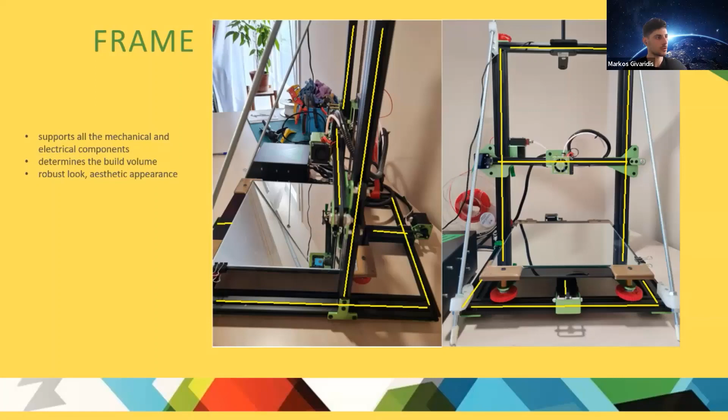So, when choosing a 3D printer frame, one has to consider the cost, the ease of assembly, the strength and the durability, as well as the application in terms of desired build volume. Now, aesthetics may be a great consideration to designers and businesses who may want their printer to look good and presentable to the public.

However, it may not be an issue to printers solely used for experimentation or basic prototyping. For example, me - I'm not a designer or a business, so I don't really care about the looks of the printer. So I can use something like this.

Now, if you search the internet for FDM 3D printers, you may notice that most of them have aluminum frames or steel frames, which look like the one in the picture on the left here. Those provide durability and vibration resistance. This is why most manufacturers decide to use this type of aluminum or steel profiles in order to create the frames of their 3D printers.

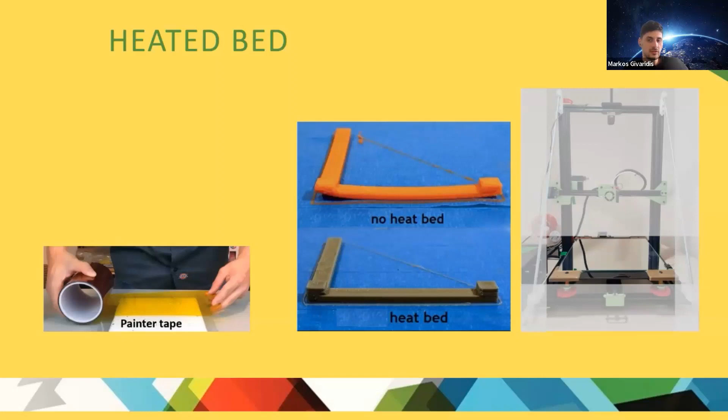FDM printers extrude molten plastic at a temperature high enough to allow it to flow, but low enough to cool and resolidify in a predictable way. However, if cooling happens too quickly, or the extruded filament reaches too low a temperature, it contracts too much, internal stresses build up, and adhesion and warping issues start to occur, especially at the interface with the printing surface. That's why the heated print bed should be at a high temperature while printing.

Moving on to the next slide, we can see some types of covers for our surface. The most common one is the glass cover, which is simply a glass surface added on top of the heated surface, so that we can extract it when we want to, take it out with the 3D printed part, cool the temperature, and this way it's much easier to take out the 3D printed part.

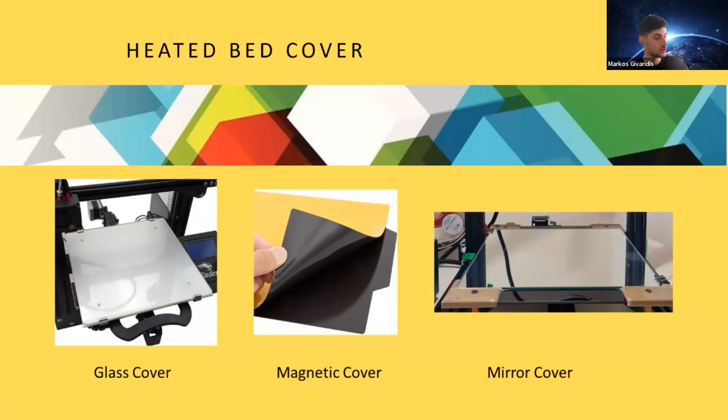Because you don't have to do the whole process of trying to create the perfect adhesion in the bed for the 3D printed model to stick onto. So choose the magnetic cover when you start 3D printing, then decide if you want to go to the glass cover or the mirror cover. Now, since I already talked a little bit about the adhesion stuff, let's see some adhesion solutions. So if you decide to go with the mirror instead of the magnetic bed cover, then you may also decide to use some of those techniques.

Some of the most standard products that people use in order for the model to stick on top of the bed is a classic glue. Here in Greece, we have the standard Uhu stick glue. I don't know if you also have it in your countries, but this is the most commonly known one. Another way to help your model stick on top of the bed is with the use of duct tape, as we saw on the previous slides. And my personal favorite is the hairspray.

It is the fastest one, and there are special sprays in the market, like the one shown in the picture, that are used just for this reason, which don't stick anywhere, but do a great job when it comes to the adhesion problem. So yeah, this is my personal favorite, and this is the one that I would suggest.

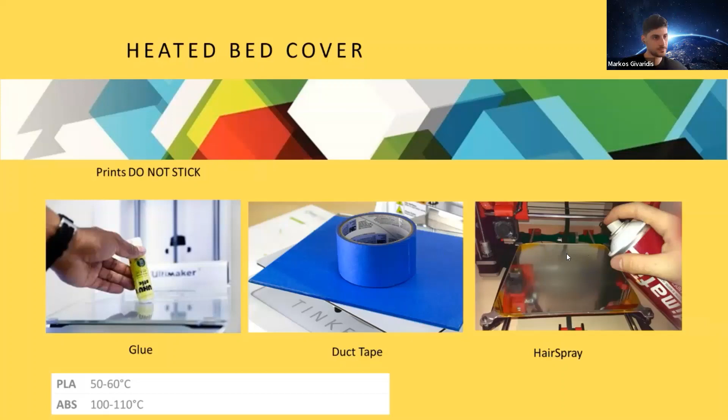Now, as we've already said, in order for the printer to print a 3D model, we need to actuate three axes, the X, Y, and Z axis. The X and Z axes are actuated on top of the bed, where the hotend is, but the third one, the Y axis, is actuated on the bottom, under the bed. Now let me show you the first video in order for you to understand, okay? This is the Y axis.

And this is the motor, which works when the printer is on in order to move the print bed to the front or to the back of the printer.

Now let's talk a little bit about the nozzle or the hotend. Sorry, the nozzle is this part, and the hotend is the whole component, which also includes the fan and the inside components.

Now, the hotend is one of the most important components of the 3D printer. As it heats the filament, it pushes it through the attached nozzle, extruding it in liquid form on the bottom and starting to print the model. Hotends are usually very durable and conductive, and they are constructed by metal, consisting of a few elements, which we will see on the next slide.

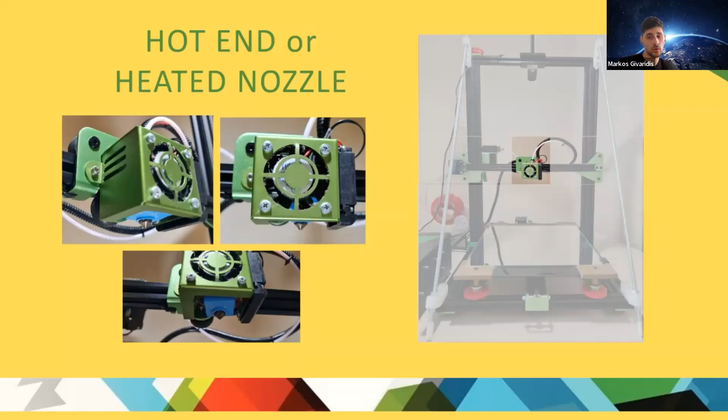In my opinion, the hotend is a very critical component of a 3D printer, and issues in this area can have very significant effects on the final print. The most common issue is the clog of the hotend, which can lead to incorrect extrusion or no extrusion at all. A common cause is heat creep, where heat climbs behind the melt zone, and material melts too early, blocking the filament path.

Now, this is a much easier, much better representation of the hotend, so I can show you more clearly what happens here. The heat creep is basically that the printed filament goes through, and since the temperature is very high here, it starts to liquify at this point, then it sticks on the nozzle. It doesn't go through. You still push it with the extruder, and the clog occurs. So your print basically fails.

Now let's see the standard procedure, the one that should happen.

Before deeply analyzing the main aspects of the hotend, some aspects of plastic filaments need to be taken into account. First of all, plastic is a combination of a polymer and additives. A polymer can be described as a material made of long and repeating chains of molecules. All these chains can modify their viscous behavior depending on the temperature.

At this point, in most polymers, there are two critical temperatures: glass transition temperature and melting temperature. Glass transition temperature, or TG, is when a polymer is in a semi-crystalline state and its chains have no mobility. Beyond the glass transition temperature, it turns to a rubbery state, expanding itself, and the chains gain some mobility.

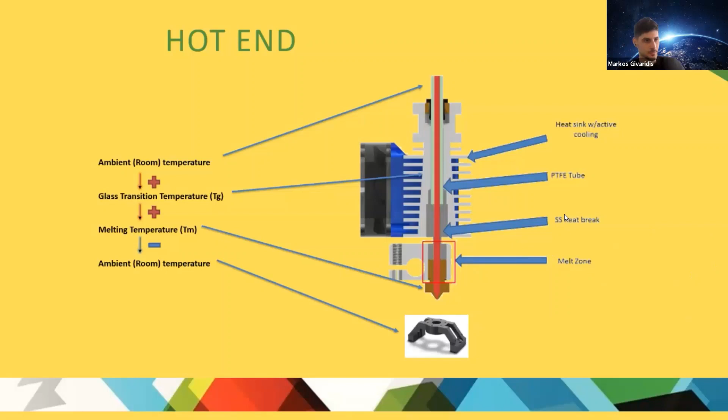All right, now let's see some components of the hotend. First of all, there's the nozzle, this one, which as you can see is pretty small, which is the part where melted filament comes out of the hotend. Of course, you have to know that the size of the nozzle defines the resolution in the XY plane, and therefore the print quality of the whole print.

Then there's a heater block, which joins the nozzle to the heat break and holds the heater cartridge and thermistor. Here are the inputs of the heater cartridge and thermistor. So I think this is a thermistor.

And then there's a heatsink which cools down the cold part of the hotend using a fan and lateral fins. It is made mostly of aluminum to easily dissipate the heat through the fins.

Poll time. So now let's stop a little bit so we can all decide what's the right answer.

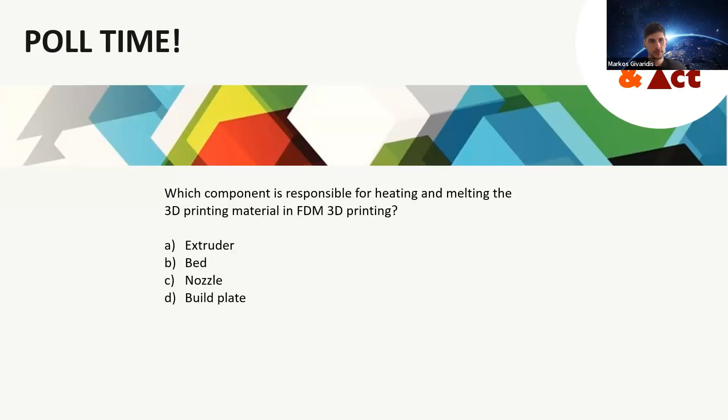All right, let's close the poll and go on. So this is a hotend. This is a small video where you can see how the hotend works.

Let's see how it moves on the X and Z axis. Here you see it manually moving. I think this is Julie moving the hotend right and left, this is the X-axis. Also, this is the Z-axis, moving up and down.

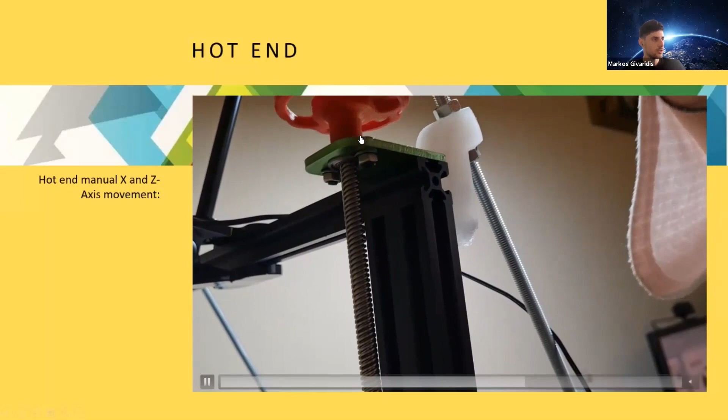So this is a manual way to move your printer on the Z-axis. And we also printed this part in order to make it easier to use the manual movement. You can also do it.

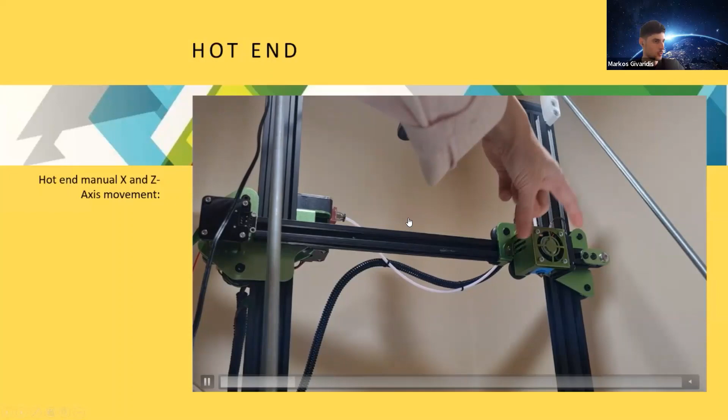There are many 3D printed files that you can find on the web that you can print to assist your printer and make it even better, let's say, maybe even more robust, or sometimes even make the printer more accurate.

All right, now how are things moving? This is a small summary of what we said. There are at least 4 motors on a standard FDM 3D printer.

There are 3 motors, one for each axis, and then there is an extra motor for extrusion. So basically what the 4th motor does is push the filament inside the hotend.

How do they stop? Every motor has a stop switch at the end of its movement, and when it touches the switch, it stops moving. This way, even if we don't program the 3D printer correctly, the motors won't be damaged because they will always stop when they meet the switches.

Now, apart from motors, in order for the components to move, we need belts, which connect the motors with the hotend, and guides on which the hotend and the whole structure can move.

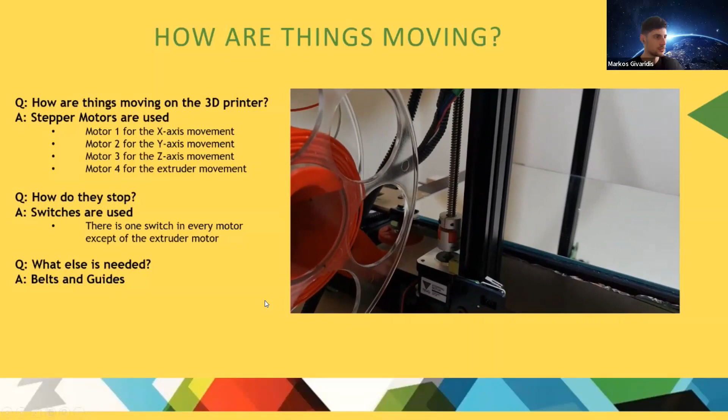Let me show you a small video. So here you can see it moving on the Z-axis. So this is the motor.

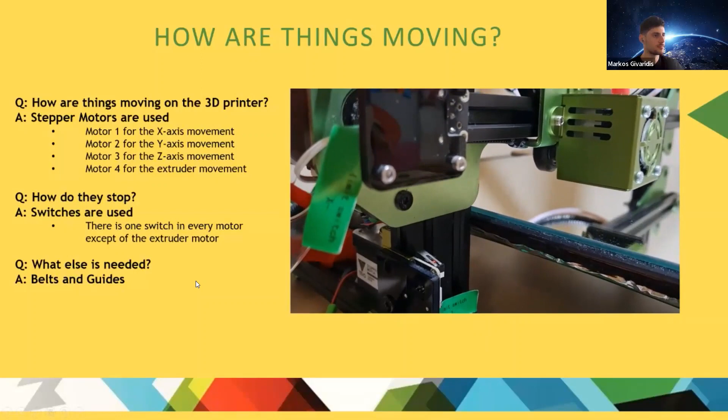Is that it? Maybe. Okay, I think in the next slide we will see those components. Yes.

So here you can see the stepper motors, the belts. This is one belt, another belt you can see here, so this is the Y-axis belt, the X-axis belt, and the Z-axis is moved through this linear actuator here.

And not a belt. I think we can see some switches maybe here, I'm not sure. Maybe I think this one is a switch, but also this one is a switch.

So imagine this component going through the whole X-axis until it reaches this point. And when it touches the switch, of course, it stops so you don't break the 3D printer.

Okay, now probably the most important part of the 3D printer is the extruder.

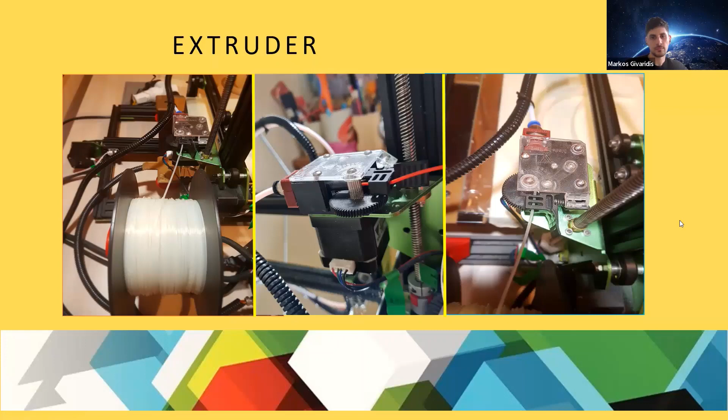Most people, when they refer to the extruder, they are talking about the cold end, this part that you can see here. The cold end utilizes the rotation of a gear, with the use of a motor, in order to push a filament inside the hotend. But the truth is that the extruder module includes both the cold end and hot end.

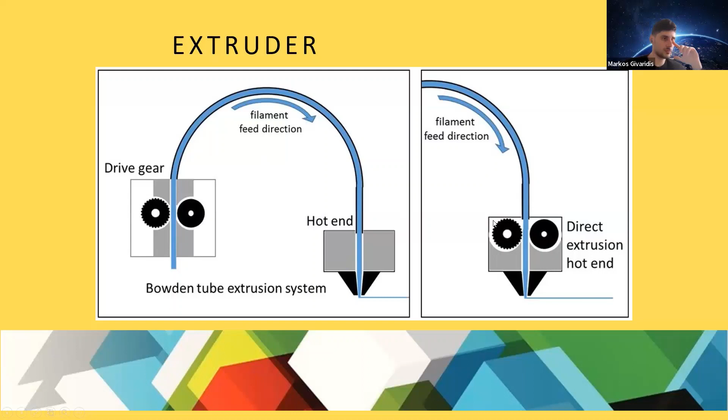On the other side, you can see a direct extrusion system. The only difference here is that the hot end and the cold end are positioned together. In this case, there is no tube. You push the filament right inside the 3D printer, the extruder, and start printing directly from here, so no Bowden tube here. These are the two standard ways, and I think there is no other way right now that you can do it.

Let's do a small comparison between those two. The Bowden extrusion system has cleaner movements, meaning that since the cold end is not attached to the hot end, there are no vibrations from the motor or the cold end, which could end up to a bad print. Also, since you can place the cold end anywhere on the printer, we have the ability to create printers with larger build volume. On the disadvantages, we need a more powerful motor in order to overpass the friction inside the tube, but let's say this is not a much more powerful motor, it's just to bypass the tube. But most important is that we have slower response times between the cold end and the hot end, and sometimes this leads to material complications and print failures.

That's why most of the new printers use the direct extruder, so they have less printing failures. On the direct extrusion system, it is more reliable in terms of extrusion, and therefore in terms of retraction also. We need a less powerful motor since the systems connect together, and it works with a wider range of filaments with ease. On the cons, since the system connects, we have vibrations from the motor, and also it's harder to do maintenance since everything is together, and it's hard to understand where the problem is sometimes.

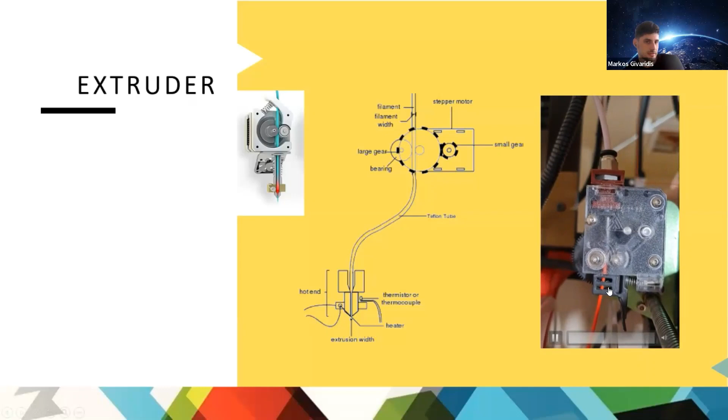Now you can see how the extruder works here. It pushes the filament inside the Teflon tube, this is the Teflon or Bowden tube, and from here it goes to the Hotend and starts melting at this point. So don't make this mistake, guys. This is not this, okay? This is different than this.

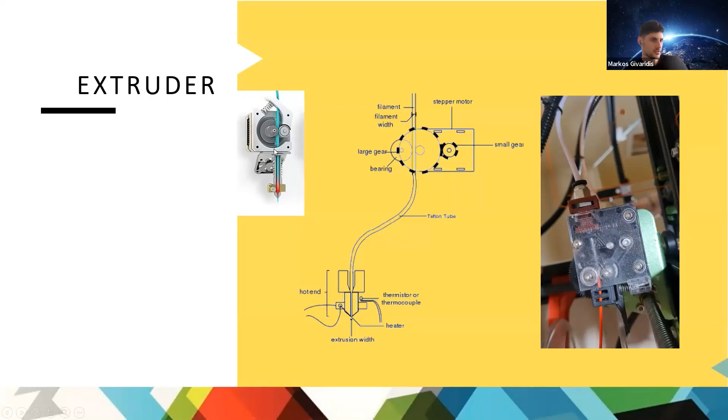All right, one more question, real fast. What is the purpose of a build plate in FDM 3D printing? A, to hold the 3D printed object in place. B, to provide a smooth surface finish. C, to prevent warping of the print. D, to apply a protective coating.

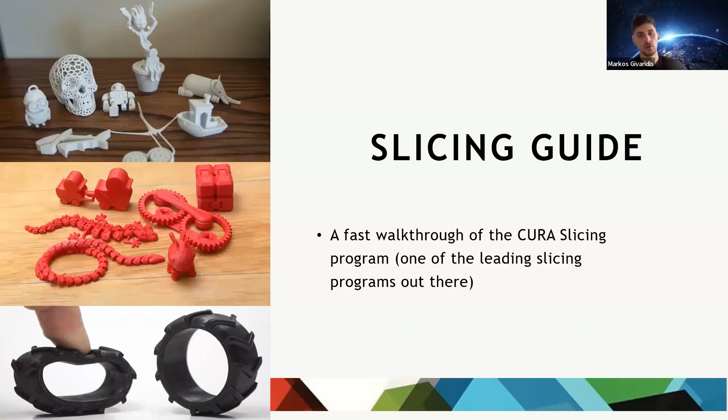Slicing guide. So here I'm going to show you real fast some slides regarding the slicing of a model. As you may know, before printing a model, we have to use a slicer program in order to basically find the right way to provide the G-code to the 3D printer so that we have a perfect print.

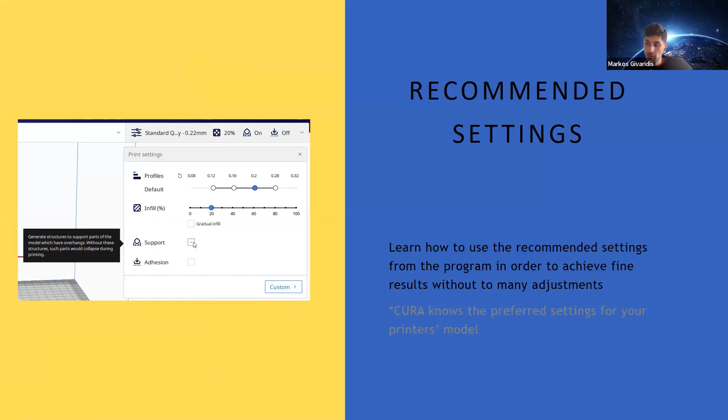Okay, we're here. The adhesion is a special way to adhere the model. So instead of using hairsprays or glues that we discussed before, you can use this type of adhesion, which is much easier because you don't have to do anything else - you just click this button. But you use much more material when you print, because basically you create a raft on the bottom of the model, a plastic raft, for it to stick.

Then we can change the walls, the wall line count. These are the walls of your prints, so as you may understand, the more walls, the more strength in the print. If you want your print to be strong, for example to give to kids to play with so they don't break it, add a lot of walls. But of course the printer will require more time and material to print it.

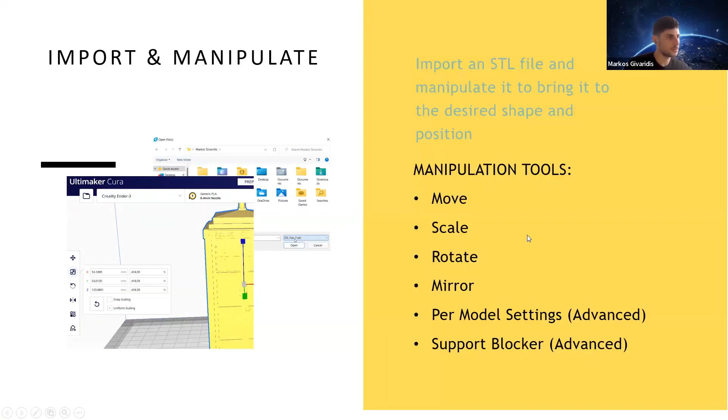Oh, oh, it's the mouse. Okay, now I understand. That's my mistake.

And the last one is the speed. Now, I put the speed here in the options for you not to touch it. If you don't know exactly what you're doing, don't mess with your printer speeds - your printer knows how fast it can print. There's no need to do more or less than what it does right now. In my opinion, you need almost a year of 3D printing experience before you start messing with printer speeds, because you may destroy it, and we don't want that.

Some other custom settings you may find yourself experimenting with are the retraction.

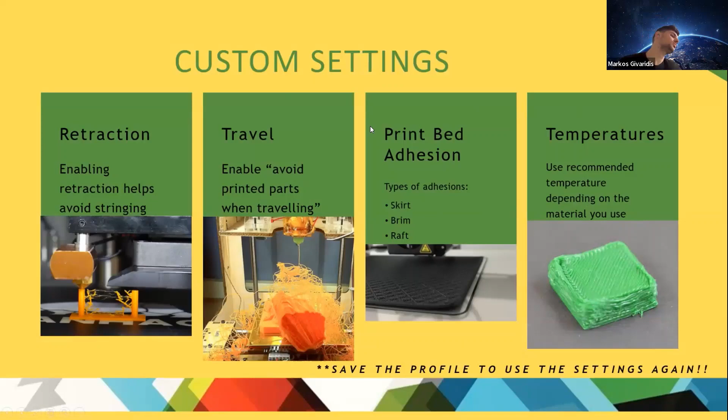And the last thing I'm writing here is that when you change all the custom settings, please save the profile so that you can use the settings again next time, so you won't have to do the whole thing all over again.

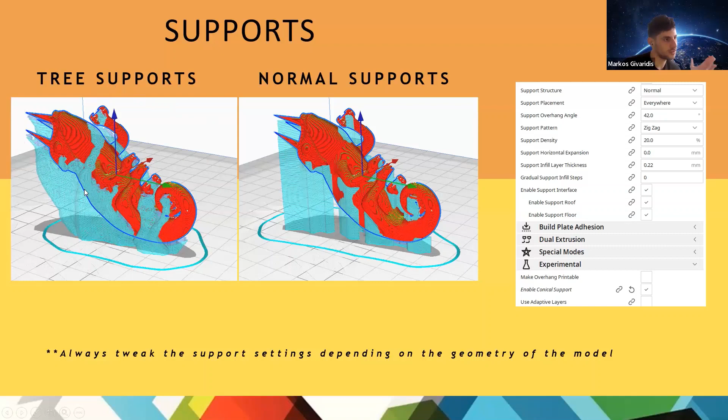I suggest that the first time you print, you go with normal supports to understand how supports work. But when you are familiar with supports, the tree supports are the perfect way, because what the tree supports do is go and touch your model exactly where it should be supported and start printing. Here, as you can see, it's supported everywhere, but with tree supports, you can find exactly where your print needs supports without touching the whole model.

Because, as you may understand, this is plastic and this is also plastic, so when you take it out of the bed, it's much harder to detach them from each other.

And you can see exactly how your print is going to go, so you can inspect your model, as I write here, and then you export it to a USB and print it.

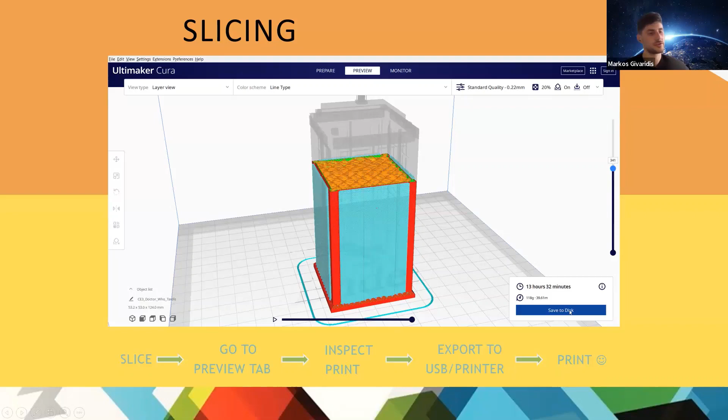The reason I'm mentioning this slicer is because it has some advantages. It has more tools like cut, arrange, etc. It has paint on supports, so you can add and delete supports manually and very easily. But this right now is not actually a pro for Prusa Slicer, because now you can also do it with Cura if you find the right add-on and experiment with it.

But the most important one is the configuration wizard, because based on the combination of your printer, the filament and material that you use, and your print, the configuration wizard designs all the parameters for you, so you don't have to manually create a custom profile, for example. I would suggest using the Prusa Slicer if you have a Prusa product, just in case.

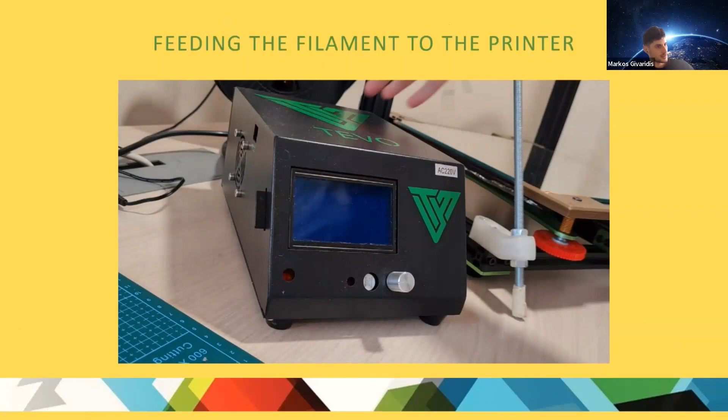We should first feed the filament, of course. We need a robust stand. We open the printer. Let me close the sound. We go to prepare.

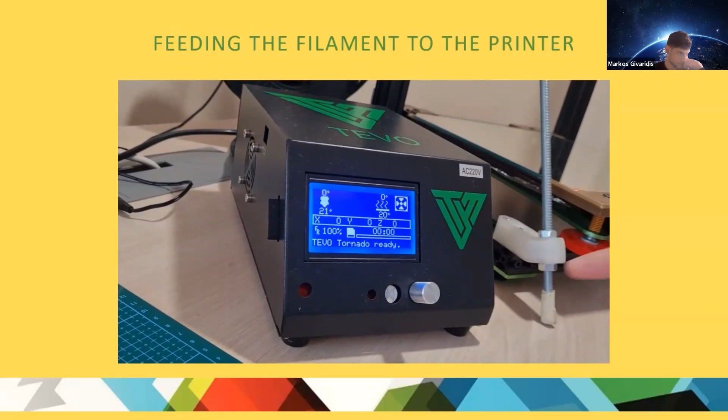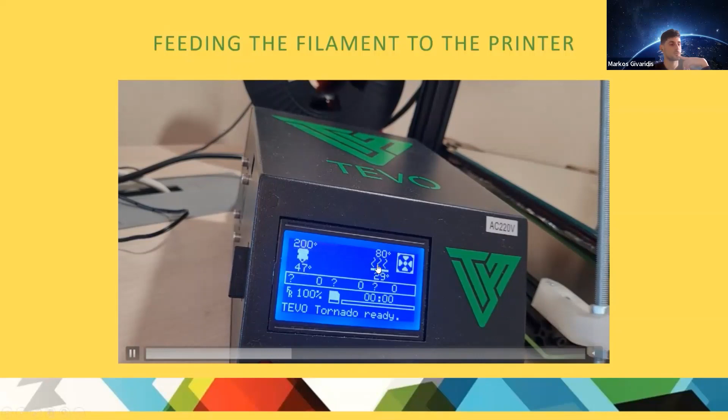Preheat. So right now, we actually preheat the bed to the right temperature. In this case, it's 50 to 60 degrees. And we also preheat the nozzle, the hotend. So when we have both of them preheated, we can feed the filament to the printer. Of course, you can also feed the filament just by preheating the nozzle. You don't need to preheat the bed, but it's good to preheat the bed if you want to start the printing process right after you import the filament.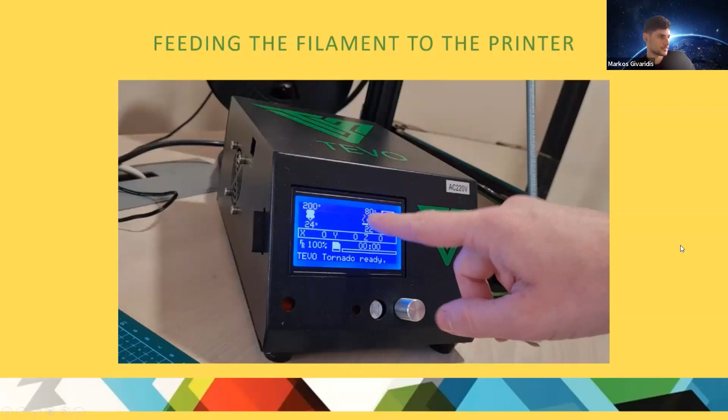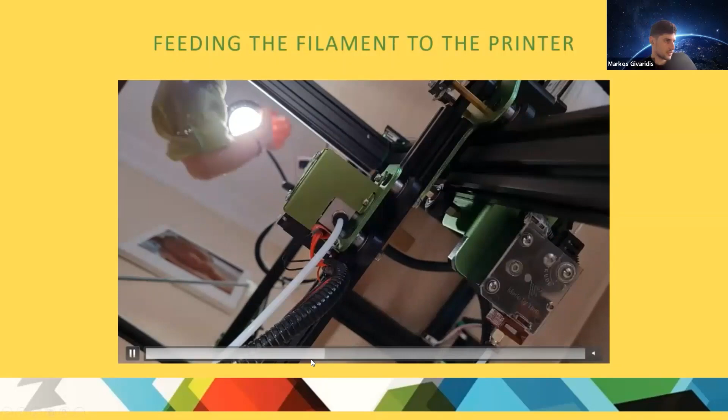Oh, sorry. All right, let's... come on. Why? Okay. Oh, wait a minute. Okay, here we are. I'm just going to... let me leave it here. So as you can see, this is the previous filament, I think. Let me see. Okay, here we are.

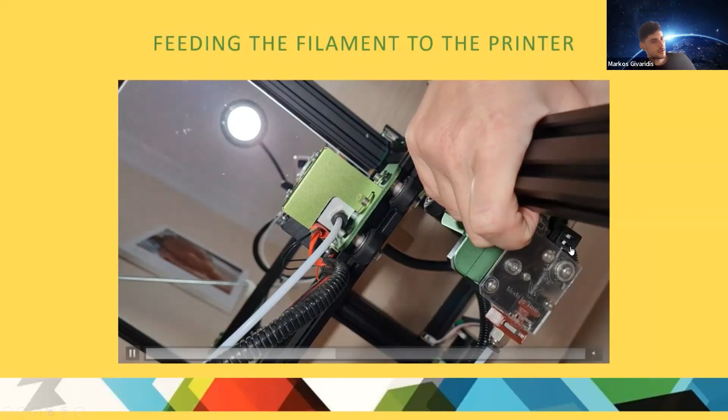As you can see here, we export the previous filament, because now the nozzle is heated, so it's liquid on this part, making it very easy to export. There is a button here that you push in order to export the filament more easily, because it locks - these are the sprockets that we talked about before. And you just take it out. That's how it looks when you take it out.

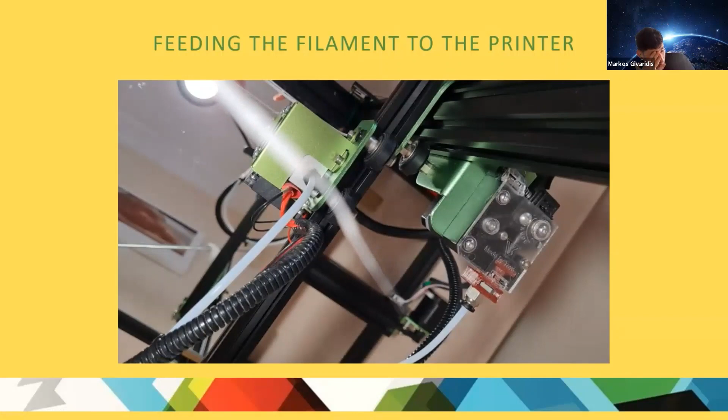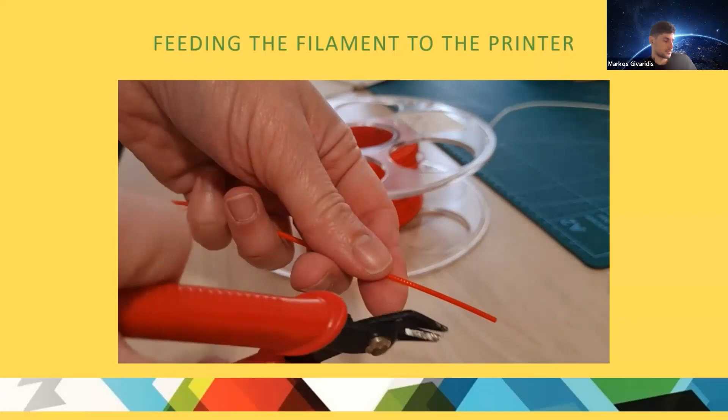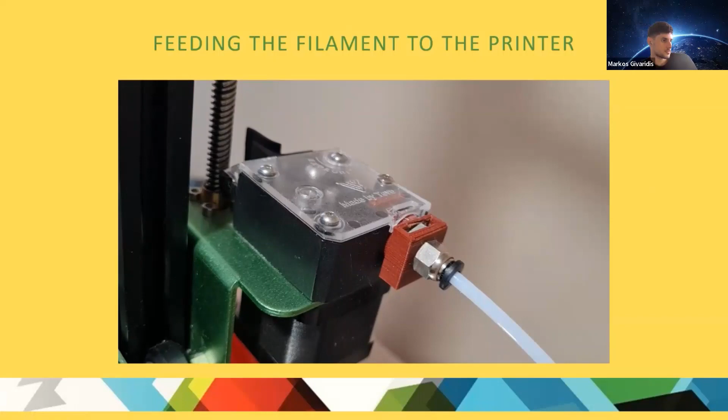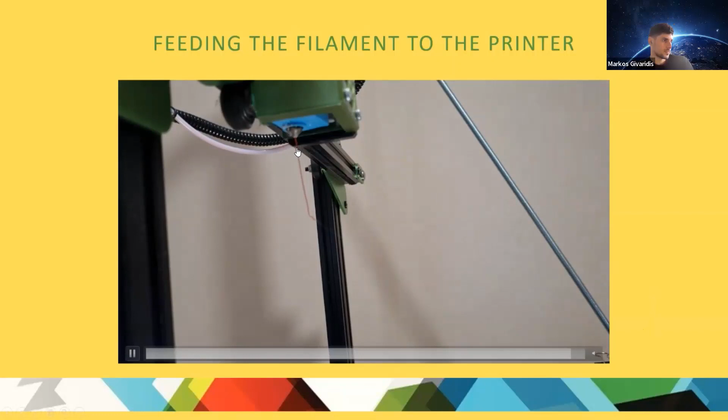And on this video, we put on the red filament now. Keeping the temperature as is, our hotend is 200 plus degrees right now. So the same way that we exported the previous filament, we import the new red filament inside the extruder. Push it through. While you push it, you may see that from white it becomes red on the nozzle. And when it's fully red, the material that you export from the nozzle is fully red, then you are ready to start printing something new. You see here, it's fully red. So we are ready to print.

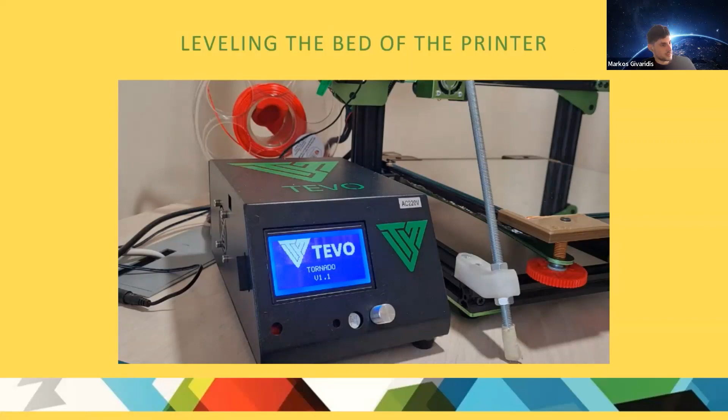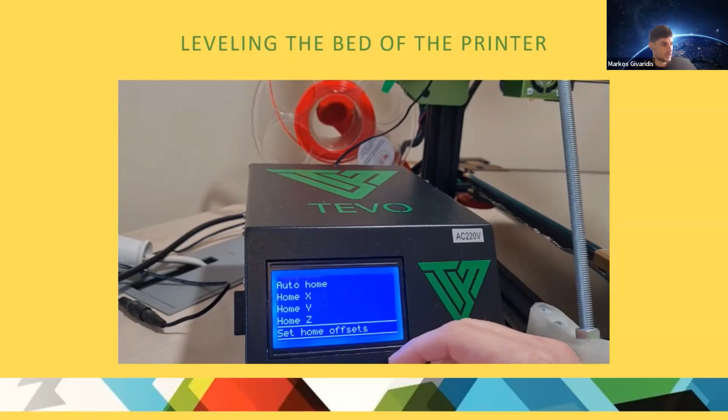Okay, another video is leveling the bed. For most of you, when you buy the printer, you will need to level your bed. Leveling your bed is not an easy process, at least for the first time. Now, what we have to do is again preheat, because we have to have everything on the printing temperature - the temperature that you actually use while printing.

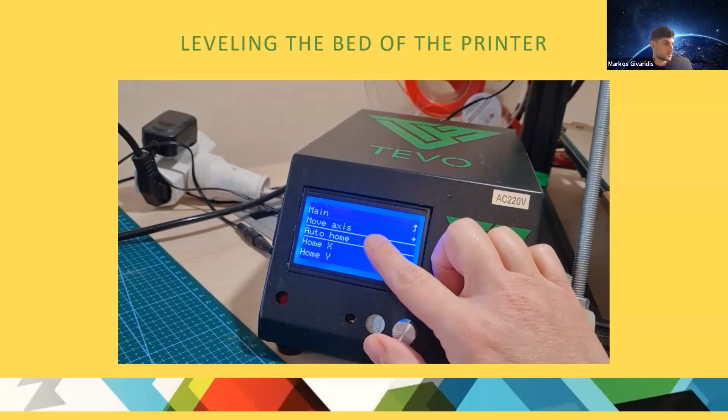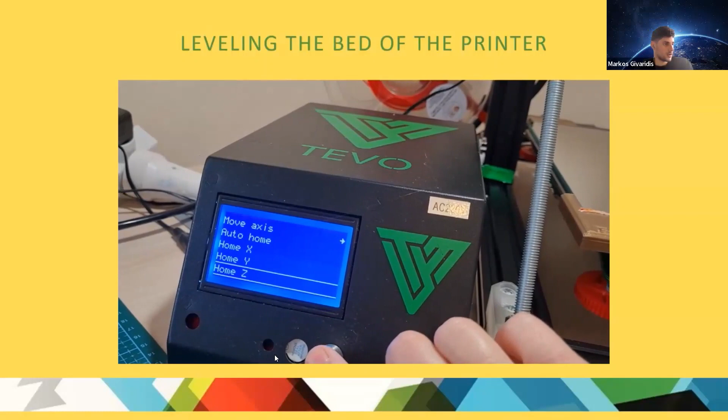The process starts with you moving the nozzle to the bottom, so you home the z-axis. Like that. And you take a piece of paper, a standard piece of paper, put it between the nozzle and the bed, like this, and try to find the sweet spot between the nozzle and the bed. The sweet spot is where the paper can go through, not stuck like you saw before - this is a much better way to show it. It has to go, as you can see, it doesn't go through. So we have to recalibrate.

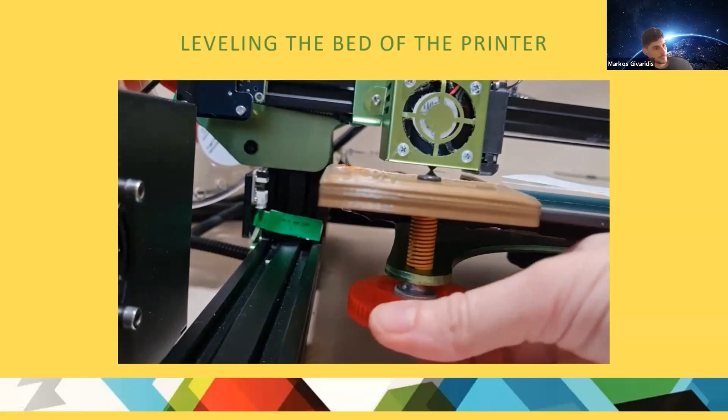On this printer and most printers, on the bottom of the bed is the calibration sprocket. As you can see now, the paper can move up and down, right and left. But you have to find some resistance when moving the paper, and this is the perfect spot. It won't be perfect if the paper doesn't find any resistance when you move it, because this means that it's over-calibrated, let's say. So again, here we try to calibrate the other corner of the print bed.

And this way we calibrate all four corners. And when we calibrate all four corners, then we can also calibrate the middle of the printer. We actually restart the whole process again and again.

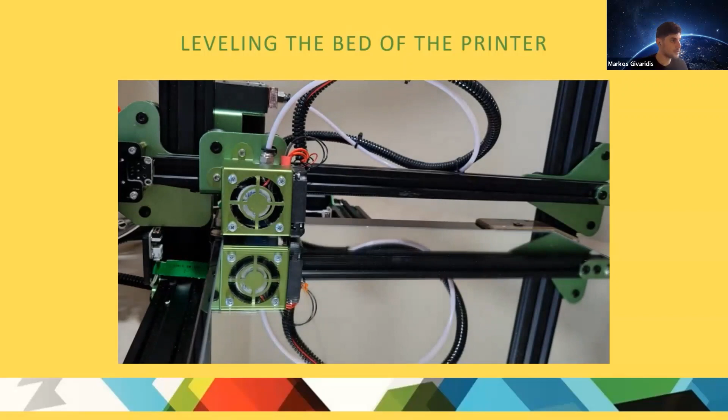Just so you know, there are many STL files that you can find on the internet that you can use and put them on your USB stick, and feed it to your printer so you can see if your printer is actually calibrated, if you did actually a good job leveling the bed.

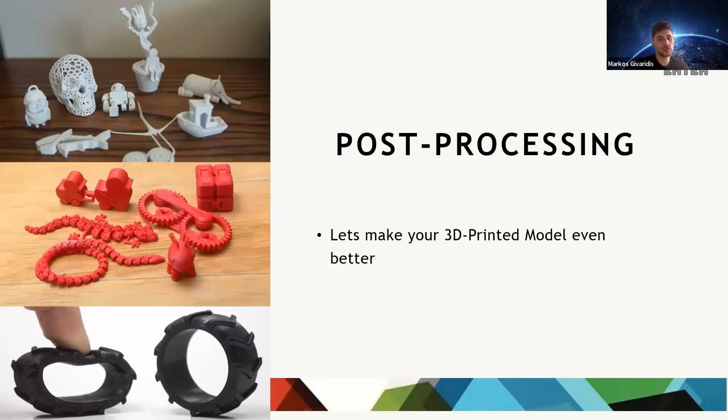The first thing we always do after print is removing the supports. This is what I was trying to tell you before regarding the standard supports and the tree supports. This is how we see the model the first time we take it out from the printer.

And those plastic parts have to be extracted from the model. So we can use many tools to extract them, and we can also use our hands to extract them. As you can see, the next step is something like this when you extract them, or something like this.

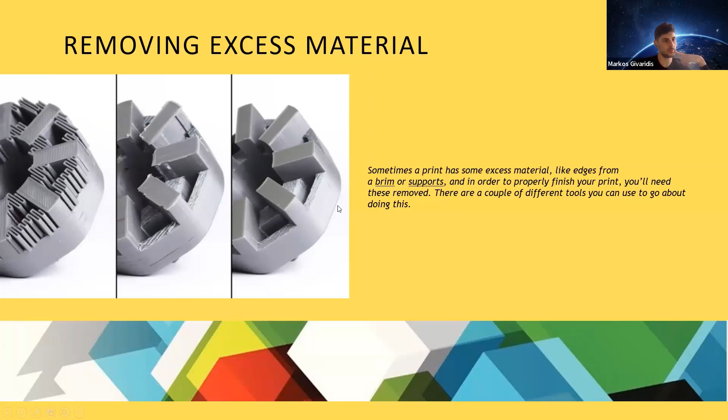Now, there's many tools, as I said, to achieve that, and you can also smoothen your prints with these tools. My personal favorite is the rotary multi-tool, which is very simple to use and also very fun to use.

Let me play the video while I'm talking. As you can see, the tool uses a motor to rotate, and the only thing you need to do is attach the appropriate sanding attachment, then start the cleaning process, which may take from 1 minute to however many minutes you want. This is not a standard procedure, so you can do it as much as you want to achieve the best results, depending on the design of the model, etc.

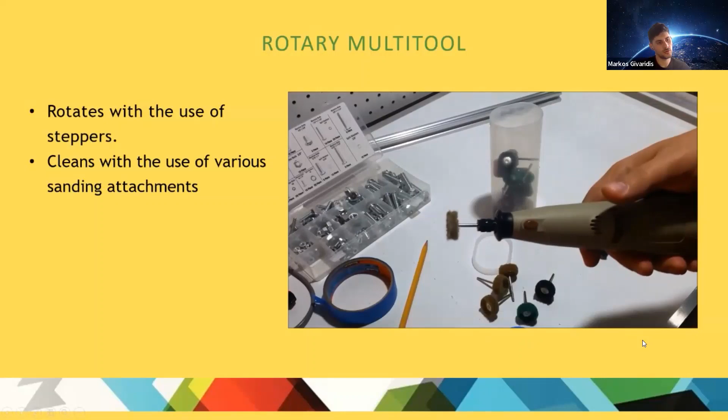And you can see what else I don't remember. Yeah, he just uses this finishing sanding tool to make the print smoother.

Okay, of course, sanding - you can always use the traditional sanding methods. For beginners out there, this is a great choice since the materials are very cheap and easy to find, and it is also very easy to do.

In any case, I would recommend watching a video on YouTube before starting the process, for those who are total beginners. This way you will know what type of sandpaper to buy and how to do it without ruining your model. Also, doing the sanding process manually, you can be more precise sometimes, because if you have a multi-tool, you may choose the manual method instead, since a multi-tool is very fast and may ruin your model.

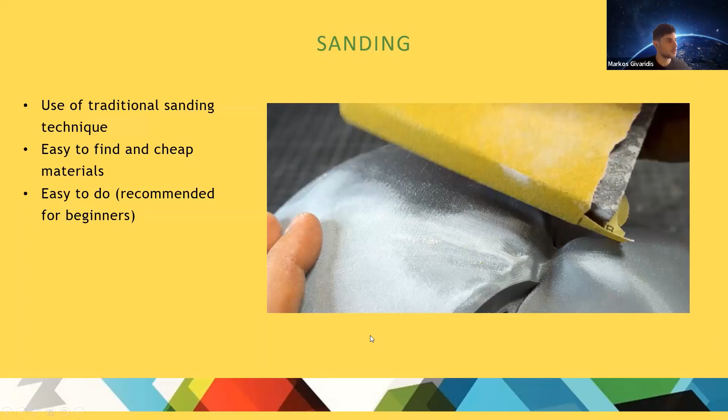So here I have a sanding video. We will see a 3D printing model being sanded.

Okay, first things first, do not forget to put your mask on, and then we are going to start sanding with a 120 grit sandpaper. Again, the coarser grit to really help knock those lines down. Now I've wrapped the sandpaper around a sponge. It helps me have a better hold of it because you're going to be doing a lot of sanding.

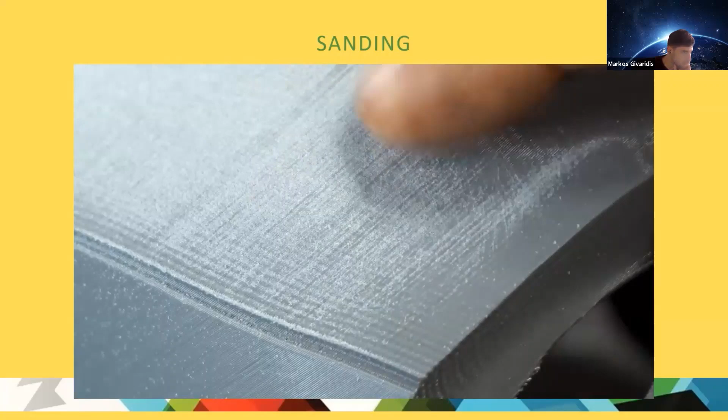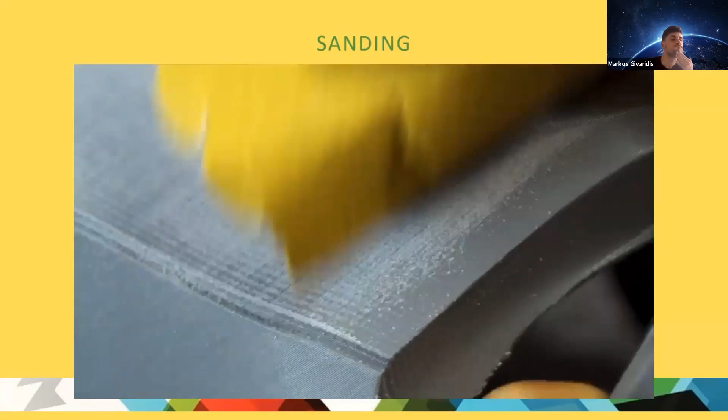So if we take a look here, we can see that the layer lines are still there. Not a lot in these helmets, really cool, but we still need to knock some more down. I'm still using the 120, and you can see the more you work that, the more you'll get rid of these layer lines, so you're not going to have to do a lot more of the finer sanding later on. You can see here the layer lines are almost gone, and you're going to want to do that across the whole helmet with that 120. Don't forget to get into the cracks and crevices - this is why I like wrapping the sandpaper around a sponge. The sponge is soft, and it really lets you get into all those little spaces to smooth that stuff out.

Now we've done the entire helmet, and it's hard to really see much of a difference, but if you look, you can see most of those layer lines are really knocked down.

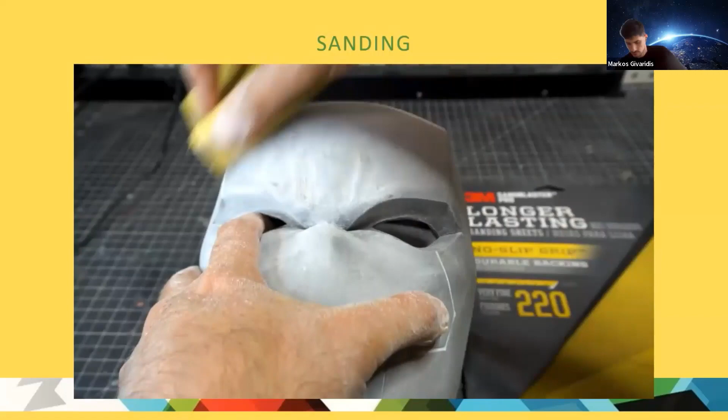Now we're going to go with the 220. Again, as we move up, the sandpaper gets finer, and it's still doing its job, making a smoother and smoother helmet. Don't forget, as you're sanding, to do all the little bits of cracks and crevices, because you don't want those to stand out.

Now we jump up to a 320. Again, a finer sandpaper, a finer finish on the helmet, and again, you're going to do the entire thing. Of course, you're still wearing your mask.

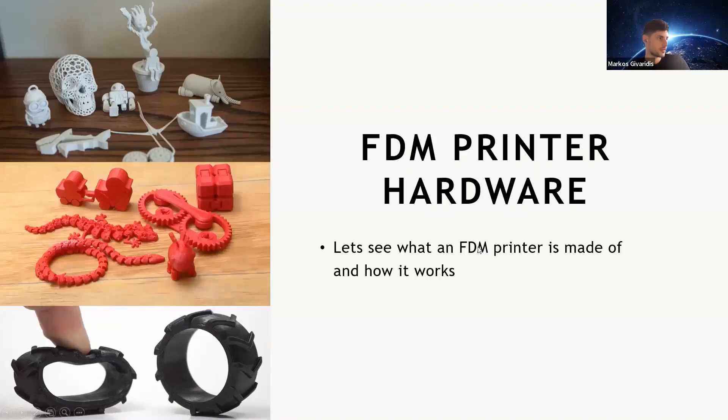All right. Oh, sorry. Okay, let's go through everything really fast. Go back where we were. Okay. Okay.

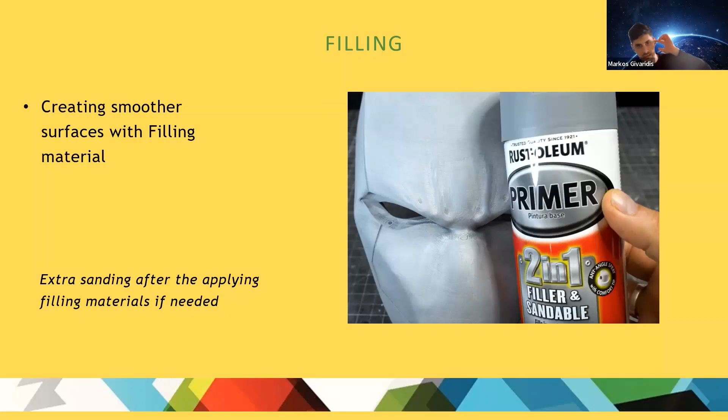Of course, after applying the filler, you can use some sandpaper and do some extra sanding if it feels like it. So basically, repeating the process.

So even after all that sanding, there are still some layer lines. You can barely feel them with your nail, but they're there. So we're going to use some fillable, sandable primer for that.

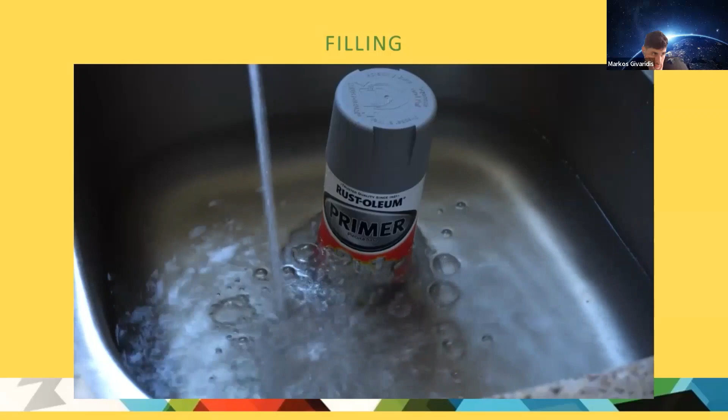Key thing is warm the can before you use this primer. Now, I like to put it in a bath of hot water for a little while. This stuff is thick, that's why it's sandable and fillable, and this way it breaks it up and makes for a great mix, and it'll coat it really well.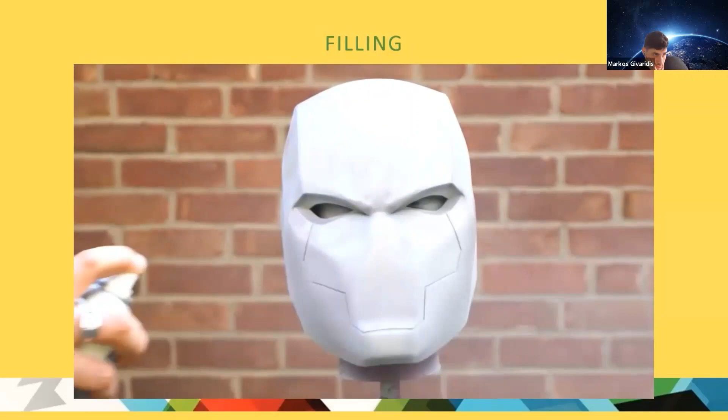Now again, make sure you're not getting too close. Stand off, as the directions say, 8 to 10 inches so you're not getting any runs, and just give this a really generous couple coats. Let it dry, maybe even get it another coat to fill in all those layer lines.

Sandable fillable primer is magic. If you look at this thing, you can see almost no lines now in this helmet. It's going to have a little bit of grit to it. You're going to have to do some sanding after this, but those major lines are gone.

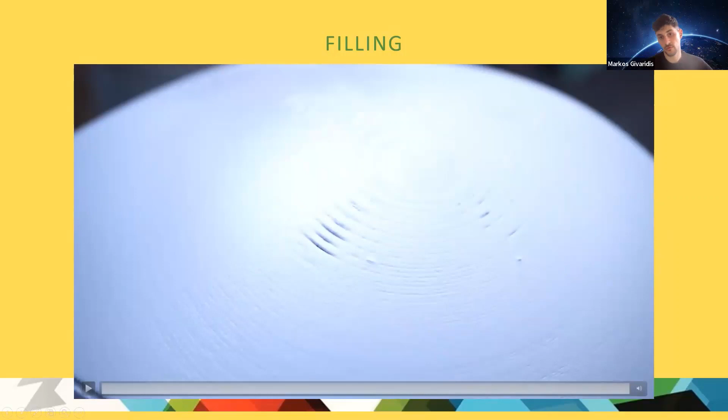So as you can see, some major lines are gone, but some are also there. But we've already done a great job, right? Sweet. So of course you can repeat this process until you feel that your model is smooth enough.

Just be careful because this process, since you sand, then fill, then sand again, you may sometimes hide some of the detail of your model, like those lines on the mask, for example. So yeah, be cautious.

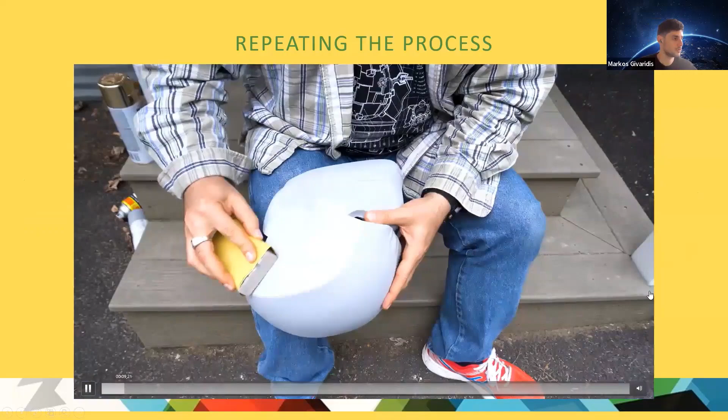Now, if you remember, we did have some thicker lines. To take care of those, we need to sand this sandable fillable primer so it is smooth before we go ahead and put on our glazing compound. And again, while you're doing it, don't forget, work in these cracks. We don't want them to fill up with the primer and the things we're using.

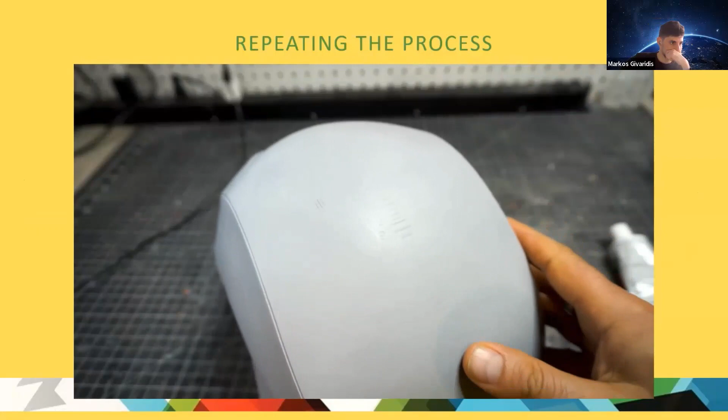Now we're going to go ahead and give this thing a wash. I wash the print multiple times during the process to get a lot of that grit off. So here we go. Here's some of those thicker layer lines.

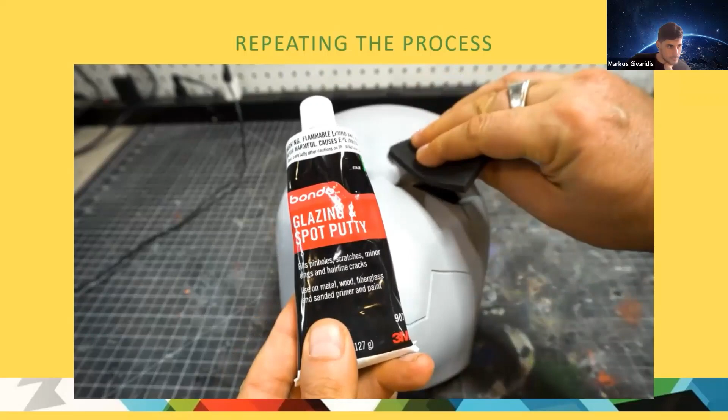And this is when we're going to use our glazing spot putty. I like to use a piece of foam because it really helps me get into the cracks and crevices when I'm working. You don't want to sort of cake this stuff on, but you want to put enough in there to fill those lines to make sure that when you sand this, you don't see them.

And some people go overboard sometimes with this glazing compound. I am guilty of it myself. You really only want to use it when you're taking care of these really thick lines and some of the minor lines throughout the helmet.

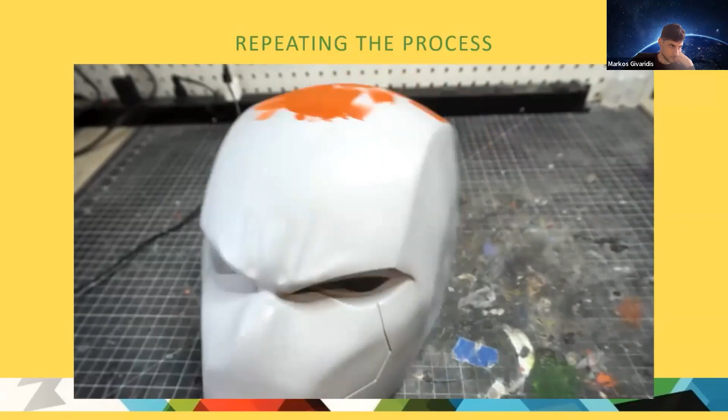At the same time, if you really want to get that smooth surface, you might go through the whole helmet like I'm going to do and find areas where you can still see some lines and take care of those. Because the last thing you want to do is get to the end and get ready to start putting paint on, or put the paint on and you start seeing some layer lines.

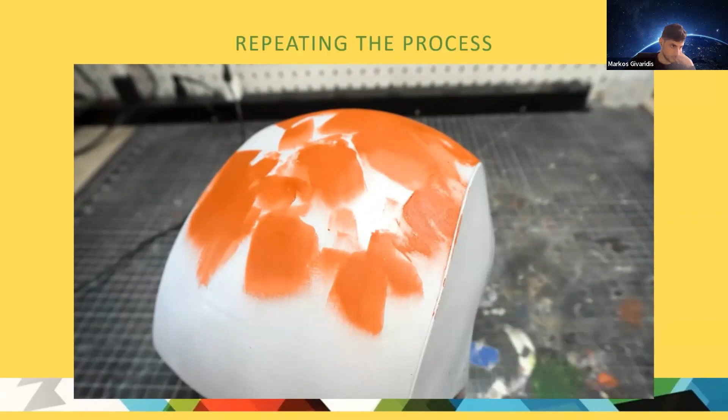Are there going to be a few layer lines here and there? Yes, we're going to do as best we can, but this is not going to be 100% perfect, but it is going to look pretty sharp.

Don't be afraid to get your fingers into all the little cracks and crevices to make sure it is taken care of. Here's an area I forget a lot of times: the underside of the helmet. Use your finger to fill in those little lines because that's something I forget, and then you can see that in the helmet. Nothing's worse than forgetting an area like that.

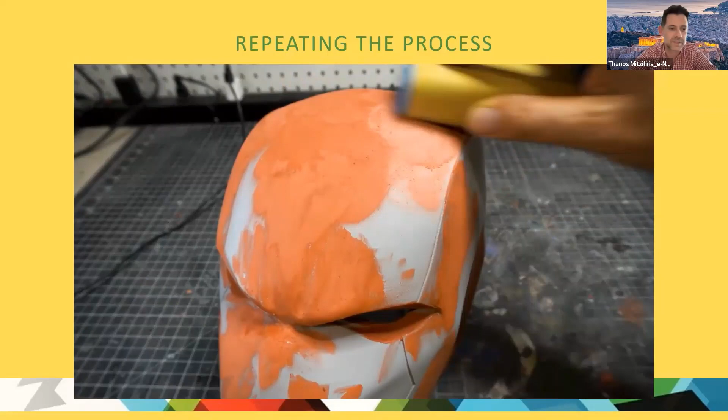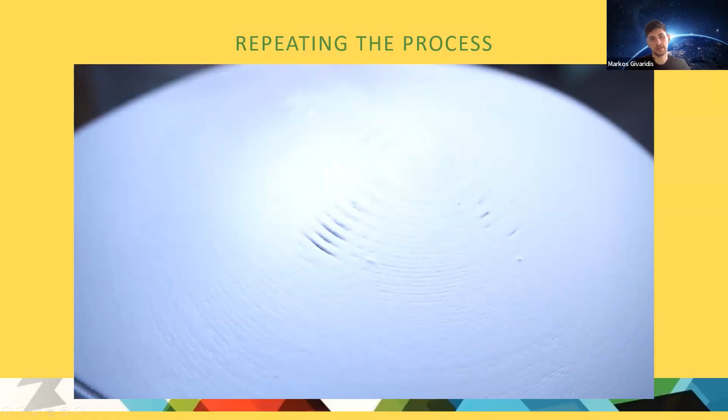So now, if you remember, we did have... let me move on to show you the final product. This is the final product after the painting, and as you can see, we can also paint it with a brush or with a spray. I would argue that this is a much greater result than the first one, after sanding and filling.

Let's not do the poll, I guess, because we don't have the time. I just want to show you the techniques we can use instead of sanding. So these are the standard ones.

As you probably know, PLA is not particularly heat resistant, which makes it not so great for outdoor applications. But it does mean you can harness the impact of heat on the plastic to finish your prints. The most commonly used tool for this is the heat gun, which you can use to create very consistent results by placing the print on a turntable and spinning it slowly to evenly distribute the heat around the model, helping prevent over-melting any specific areas.